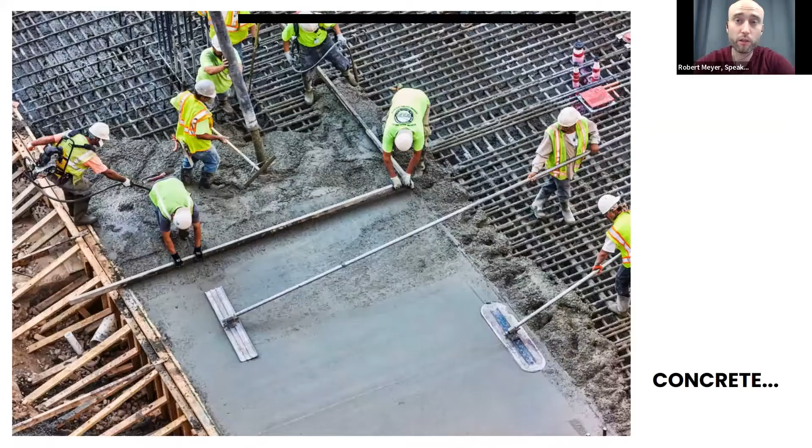So what is this big problem that cement and concrete has? Concrete is the most used building material on Earth. In fact, the only thing mankind consumes more of than concrete by volume is water. And it's just getting bigger, because it's expected that by 2060 the entire world's building stock will double.

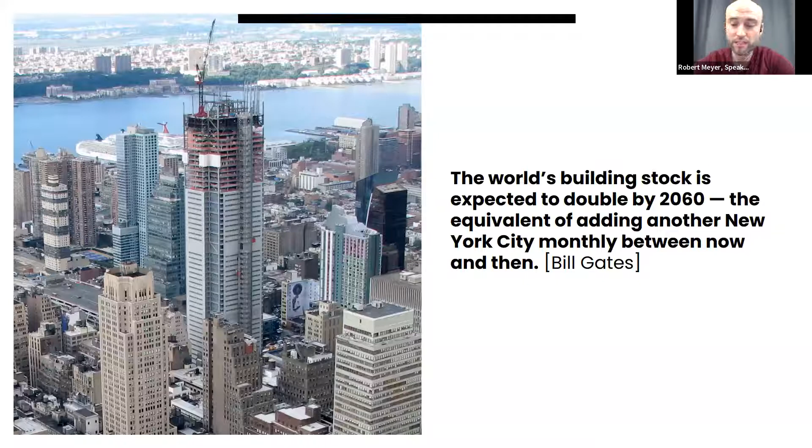That means from now until then, every month we will build the equivalent of New York City. And that's good news, because on one hand that means more housing for an ever-growing population, and on the other, more infrastructure for developing countries. But that comes with a heavy price tag: concrete has a massive carbon footprint. If concrete was a country, it would be the third largest emitter, right after China and the US, with about 8% of worldwide emissions.

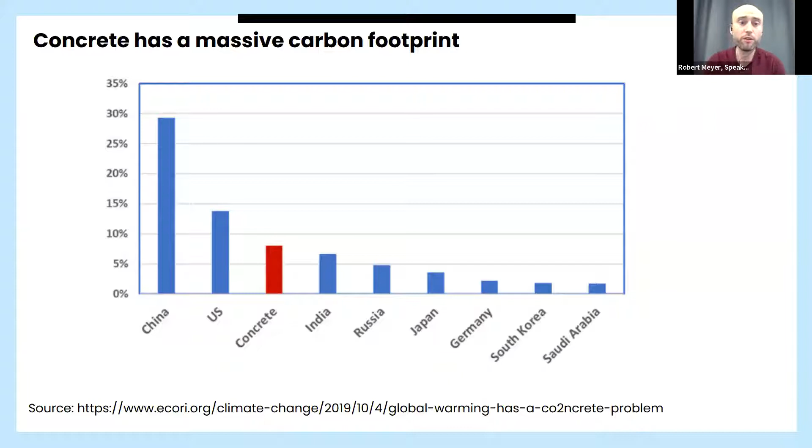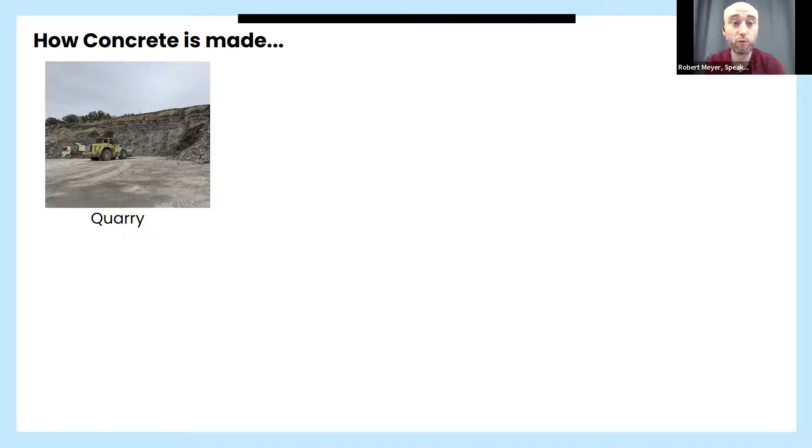So where do these emissions come from? To understand that, let's take a step back and figure out how concrete is made. It all starts in a quarry, a limestone quarry to be precise. That's great because limestone is available all around the earth, in the gigantic quantities needed to build our world. Then this limestone is taken out of the quarry into a cement plant, where it's refined into cement.

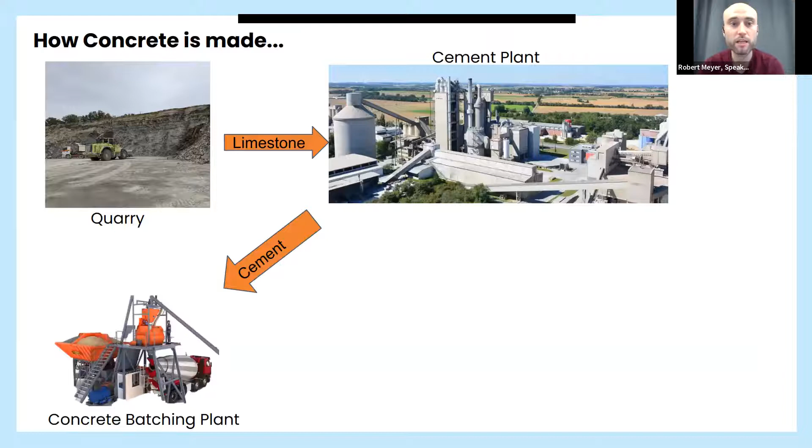This cement is the most important ingredient for concrete. It's taken to the concrete batching plant where you add sand, water, and gravel. Then you have concrete, which you can transport in mixing trucks directly to the construction site, where you pour it and build houses, bridges, you name it.

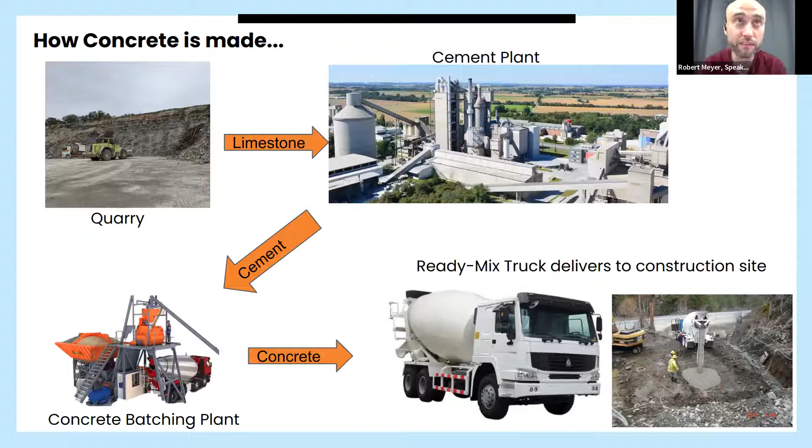Interestingly, if we look at this entire supply chain, basically the entire carbon footprint, about 90%, comes from a single step, a single step in the cement plant: the rotating kiln.

The rotating kiln is the step where you take the limestone from the quarry, which has been crushed beforehand, and heat it to 1,450 degrees. What you get out at the other end is something called clinker. Clinker is basically what gives cement and concrete their nice properties of getting hard and being able to build things with it.

The problem is, once you actually heat the limestone, the CO2 that was bound in the limestone gets released directly into the atmosphere. That's important—it means it's inherent to the production process. And that also means we cannot mitigate these CO2 emissions with renewable energies, for example.

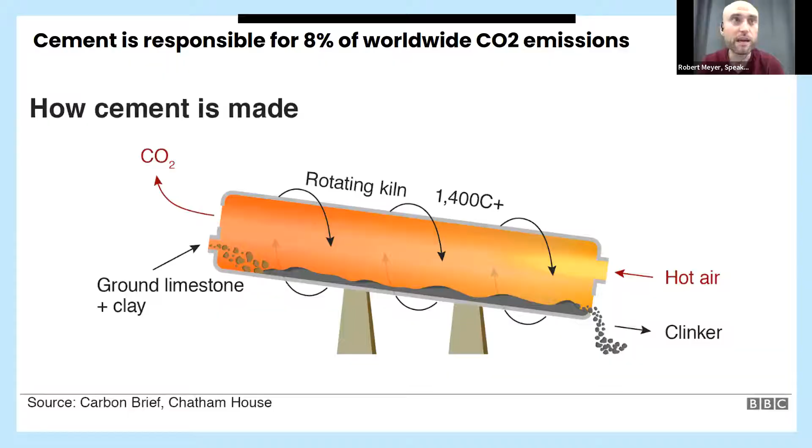So if renewable energy isn't an answer for cement, what is then? If there's this huge CO2 footprint, how can we not entirely get rid of this, but slash it by a huge amount? Here's the solution, or the one that we in our company like to propagate, because it's rather straightforward.

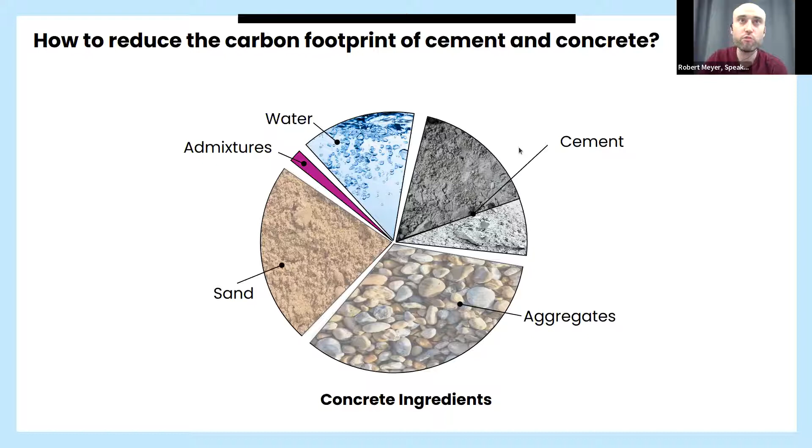If we take a closer look into what cement is made out of, basically speaking, cement is made out of just two things. One is the clinker, the stuff that's coming out of the kiln, which is responsible for the entire CO2 footprint. And then there are so-called supplementary cementitious materials, which are basically just filler materials.

Some of them have their own carbon footprint, like fly ash or slag, which are byproducts from coal power plants or steel manufacturing, but others are actually carbon-free. We are mostly interested in something called limestone flour, or fine limestone, which is limestone that has been ground very finely without burning it, meaning no CO2 was released, and therefore it doesn't have a CO2 footprint.

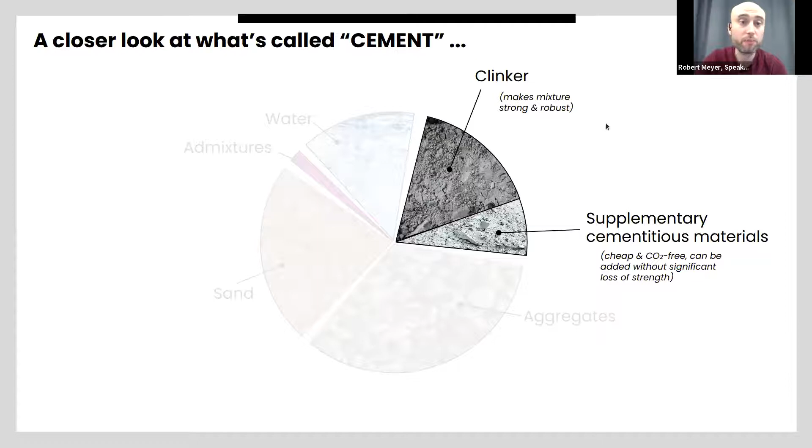So now the idea is actually very straightforward: just replace the clinker with CO2-free filler material. That's basically what we want to do - just reduce the clinker in this entire mixture.

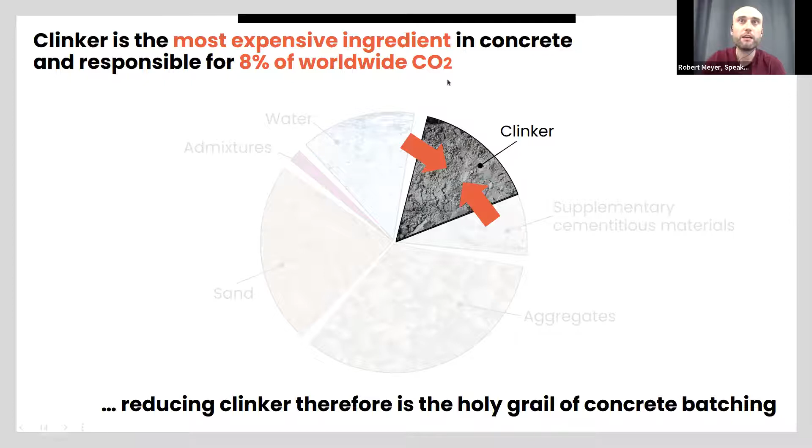So if this is regular concrete with regular cement, with lots of clinker and a high CO2 footprint, just by replacing the clinker with, for instance, limestone flour and a bit more admixtures and plasticizers, we can actually reduce the carbon footprint by 60%. So then we have low carbon concrete made out of low carbon cement, simply by replacing the clinker with CO2-free filler material. That's a very powerful lever to reduce the carbon footprint, because we can slash it by around 60%.

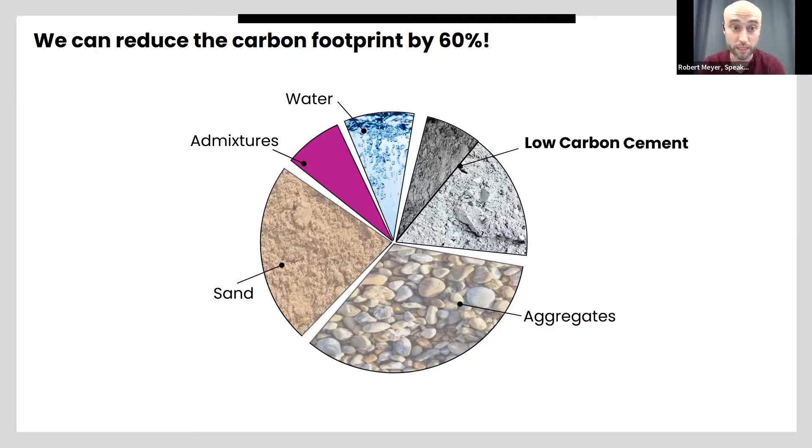And that is not a pipe dream, because we've actually done it. We created these new concrete recipes, tested them in laboratories to really make sure they're feasible building materials, and we even moved them onto real construction sites.

For instance, what you can see here is a construction site from last summer where we poured the foundation of a garage. And this summer, we moved a bit on, so there will be 3 stories of the next Berlin skyscraper also made out of this low carbon concrete. So this exists, this works, this is great.

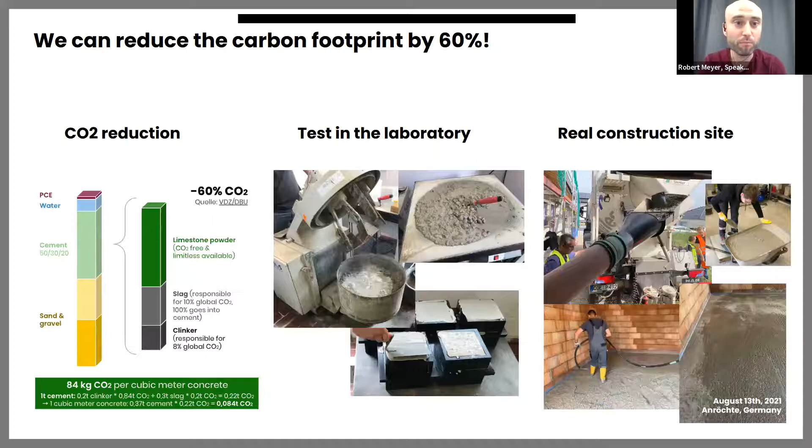So you might ask yourself, okay, low carbon concrete is there, hooray, but why on earth would you need a machine learning company or a data science company in order to produce that? There was nothing data science related yet. In order to understand this, you have to bear with me a little bit - it's going to be a bit of a lengthy explanation.

As I said, the most important property of concrete that makes it this super duper building material for the world is its compressive strength - its property to withstand huge amounts of pressure. We can measure this compressive strength of concrete in megapascal, as you can see here. And usually what you need for most building, like 80% of applications, is something around 25 or 30 to 50 megapascals right here. So this is the order of concrete we're usually looking at in mass applications.

So if concrete's most important property is strength, how can I actually modify the strength of concrete? There's basically 2 levers. One is the most straightforward one: using better cement. If I use stronger cement, I get stronger concrete, which is depicted here by these 3 different colored lines. The green line depicts weak cement, the blue one is medium strong cement, and the red one is strong cement. If I go into that direction, I can see if I take stronger cement, I get, as you can see on the y-axis here, stronger concrete - straightforward.

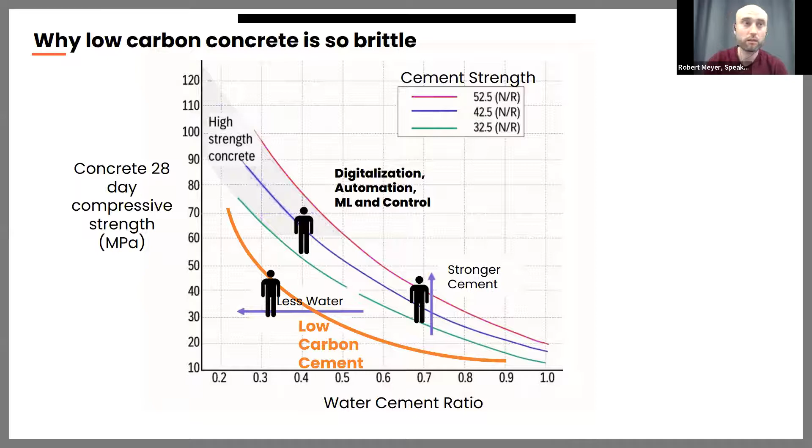Okay, so how do we do that? First of all, there's basically 2 things we need to get right. First is one in cement - we need to have a reliable compressive strength already in the cement. And the second thing we need to get right is on the concrete side of things, we need to have reliable and traceable water dosages.

Basically, this is referring to these 2 directions of errors that I can make in my concrete recipes with low water. So I need to make sure that the water is right, removing that kind of error, and I need to make sure that the cement is actually reliable. So if I order something that should have 50 megapascals, I can actually be confident that it will have 50 megapascals of compressive strength.

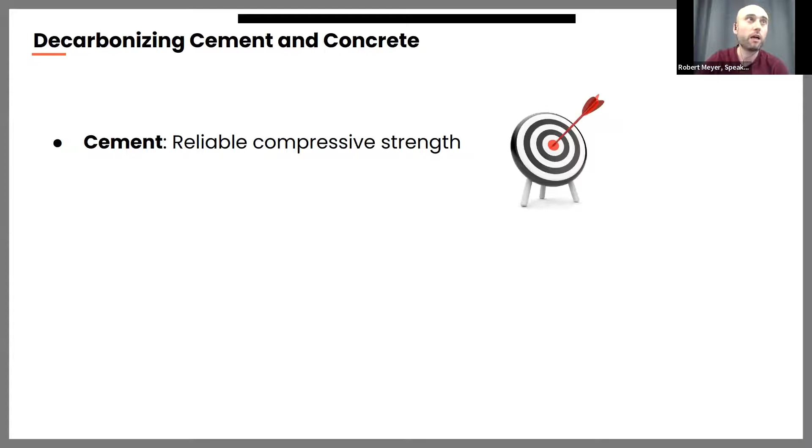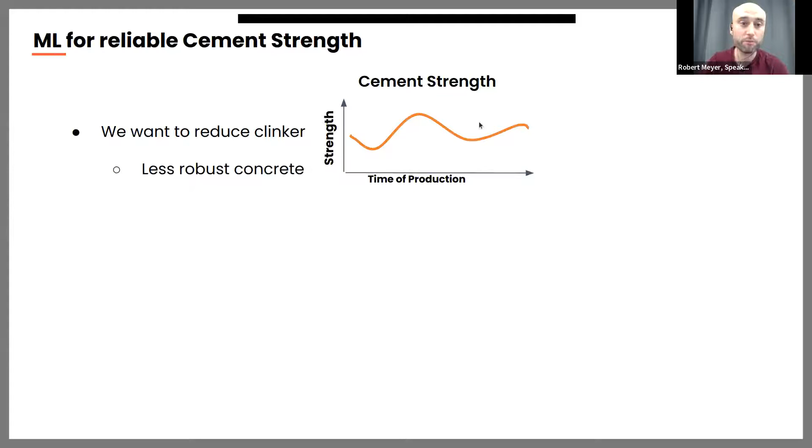Okay, let's first focus on how to do that in cement, how to get reliable compressive strength. This is important because we want to reduce clinker, which means we get a less robust concrete. So basically, if the strength of my cement already fluctuates, because we have to operate in this low water regime...

What will happen to my final concrete is it will fluctuate tremendously. So if this is the strength at the time of production, basically my low carbon concrete recipes with very few drops of water will actually amplify any problem that is already present in the cement strength. So what I want, instead of this fluctuating curve, is a very consistent homogeneous product - this should actually be a straight line.

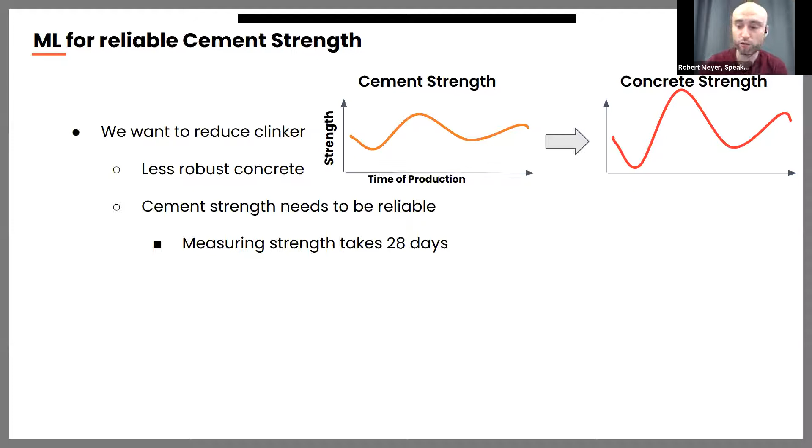The problem is actually getting cement strength right is a very difficult endeavor. And the reason is because measuring strength, be it cement or concrete, actually always requires you to make a concrete cube. So if I want to measure the cement strength, I take a standardized amount of sand and a standardized amount of water, form a little cube, let it sit and harden for 28 days, and then you have to crush it. So it kind of looks like this - you have this cube that was hardened for 28 days, and then you crush it, and basically then you can measure your strength.

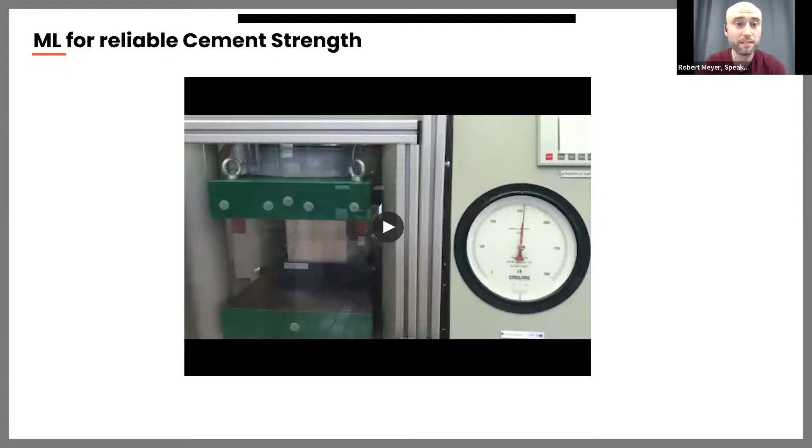But that's quite problematic, because that means for everything I produce, the core quality of my product is only known to me a month after I produced it. And then already all of the cement I produced and all of the concrete made out of it will already have been shipped and used at the construction site. So basically I can only correct my errors a month after I produce stuff. And this is, of course, very, very difficult to handle.

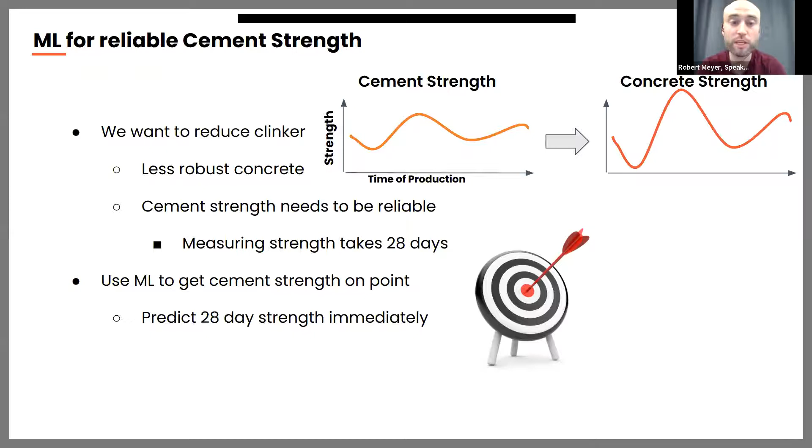And if I can only react with a 28-day delay, getting something like very homogeneous and reliable is really, really difficult. So what we now do is basically try to predict the 28-day strength at the time of production, so we get rid of this 28-day delay entirely.

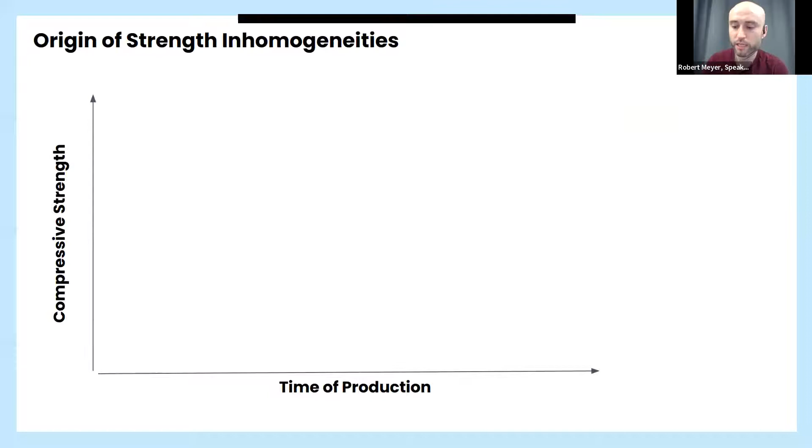A quick side note, you might be wondering why cement strength fluctuates. As I said, cement is made out of a natural ingredient. It's basically limestone that has been ground very finely, burned and ground. So the chemical and mineralogical properties of the limestone propagate into the cement and have strong influences on the compressive strength.

Because if you look into a limestone quarry, every cubic meter looks very different. You can see it by the colorful stones in a limestone quarry, there's lots of variation in nature. So this is what you can see here.

So maybe last Tuesday, I got very fine limestone, which produced cement that got very strong. But a week later, I'm unlucky and my limestone isn't as good in its chemical and mineralogical composition, and I get cement that doesn't get as strong. This is how these fluctuations in cement strength actually happen over time of production.

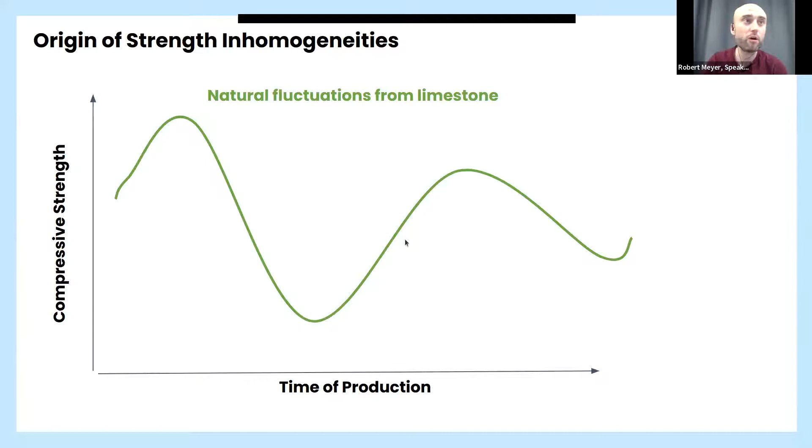So the idea is that we counterbalance these fluctuations with another property that has a strong influence on the strength of the material, and that is the fineness. Because the more finely I grind my cement, the more surface area it has to interact with the water and get stronger.

So if I have limestone that yields very high strength cement, I can counterbalance this by grinding much more coarsely, and vice versa. If I have something that doesn't get very strong, I grind more finely. The resulting material, due to this counterbalancing, will be very reliable and have a homogeneous strength over weeks or a month of production.

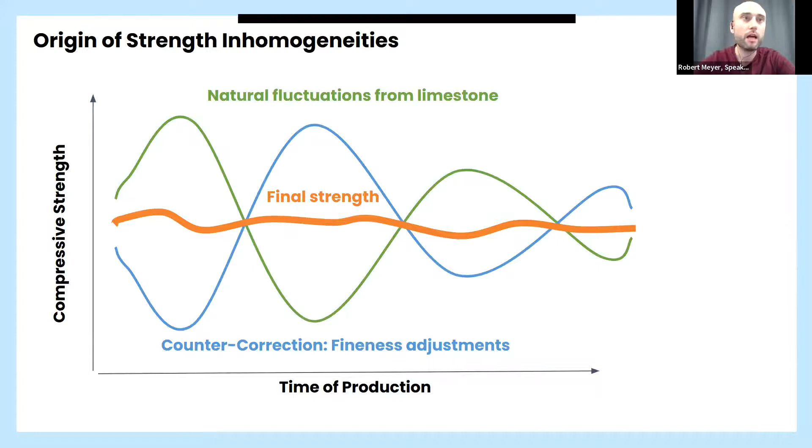So if I want to produce a cement with 50 megapascals, I can make sure that year round I will produce a cement that has 50 megapascals of compressive strength. Here's how that works in the final step of the cement plant.

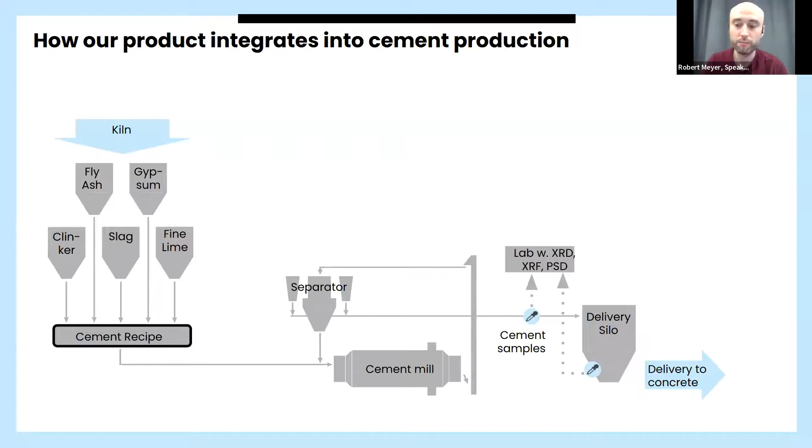And this full picture of the material is then exported into our cloud system, where we run a machine learning algorithm on this full picture of the material in order to predict the strength it would develop if I formed a cube out of it, let it sit for 28 days, and crushed it. So we really predict the 28-day strength of the material.

And now we can immediately react and don't have to wait a month until the actual strength result is realized. So if the prediction says you're producing something that's getting too strong, we can counteract and say grind more coarsely. We can calculate optimal fineness set points for the cement mill, feed that back into the plant, and the cement mill will be changed to grind a bit more coarsely.

Then a few hours later, like 1, 2, or 3 hours, the next sample is taken, and everything will be on target. This loop runs 24/7 year round in a cement plant in order to keep cement strength really on target.

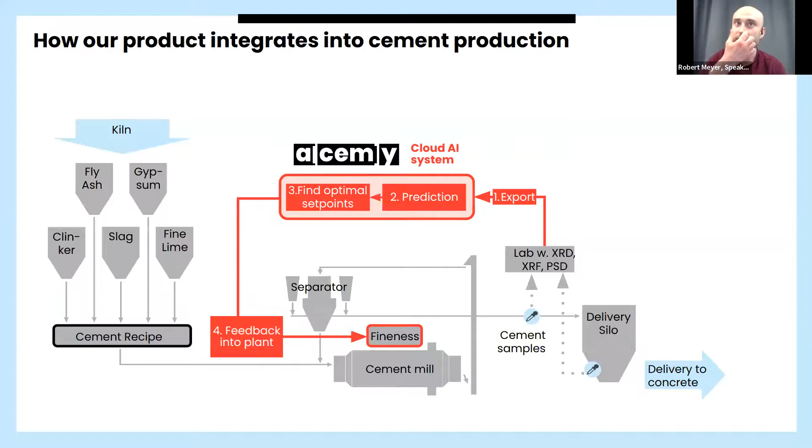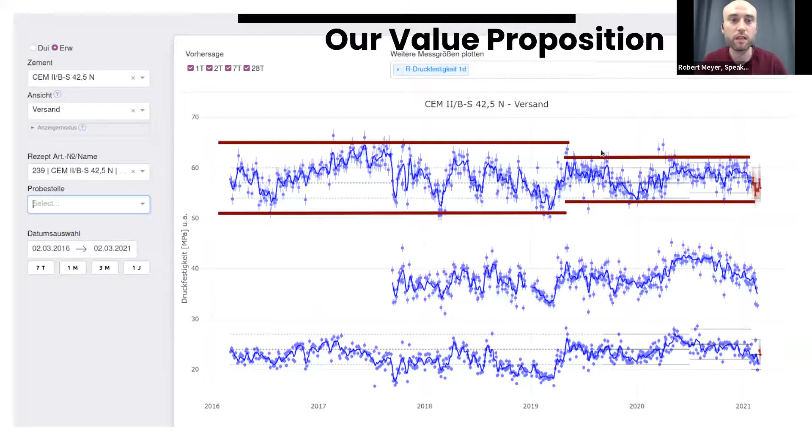It goes from 50 to 65, 66 megapascals over time. Then basically from then on, in 2019, we started with our control loop live in this particular cement plant, and we were able to reduce these fluctuations by around 25 to 30%. And this is actually quite a lot for an average cement plant.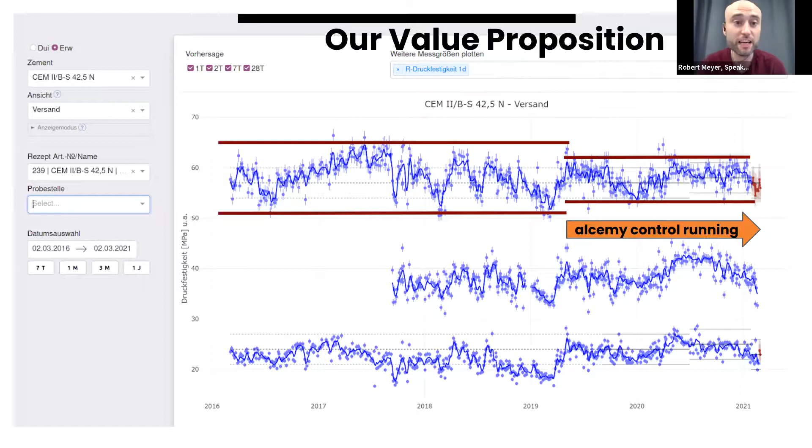Usually that amounts to savings on the order of 300,000 to 500,000 euros, a mixture of different things. It could be savings on grinding energy. It could be savings on actual CO2 certificates, because now I can really reduce the clinker even within the cement standard that I currently have, and just counteract with more fine grinding. Or because I have a better quality cement, I usually can also charge a bit more with my customers.

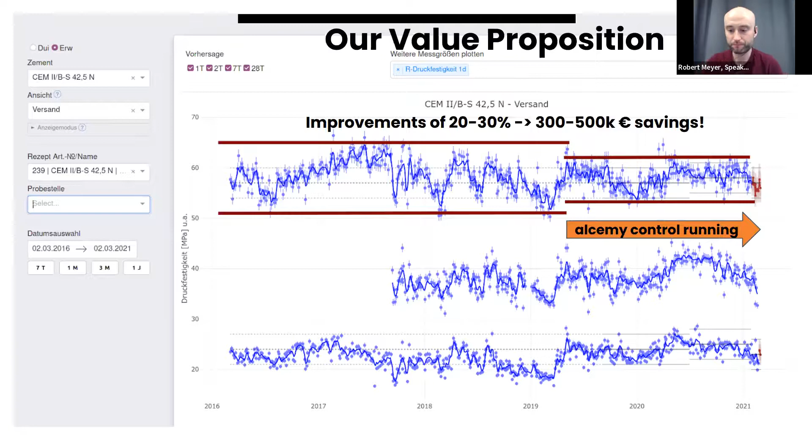So basically this is the first application of machine learning in order to get the cement strength right. I was also asked to be a bit more technical, so maybe here are some learnings that we drew on the way.

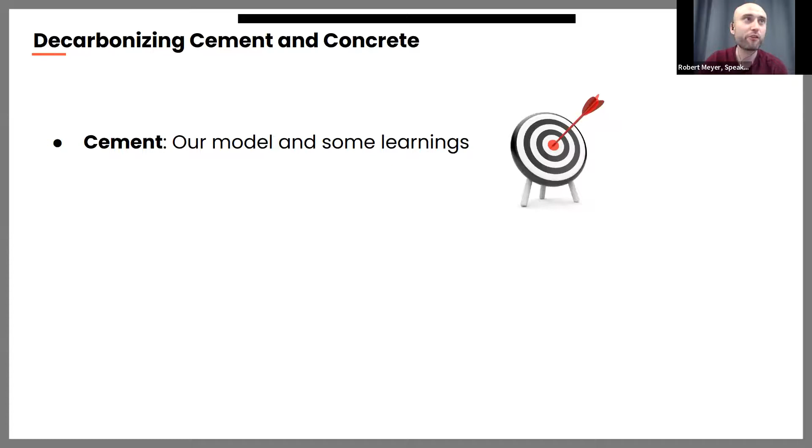Maybe for the ones that are interested, this is how the data actually looks like. It's basically for every plant that we have a giant spreadsheet. So here is the feature vector - some numbers related to the actual fineness and the particle size distribution, some numbers related to chemical compositions, and on the right you can see numbers related to the mineralogical composition of the actual material. So one of these rows makes up a feature vector, and on the left you can see the actual results of the 28-day strength experiment where they crushed a cube - this is then our target variable, and with this giant spreadsheet we can train our machine learning models.

In fact, the actual feature vector is a bit longer. This is like a subset of all the measurements that are taken from the XRF and XRD and the PSD, but basically this is how it looks like.

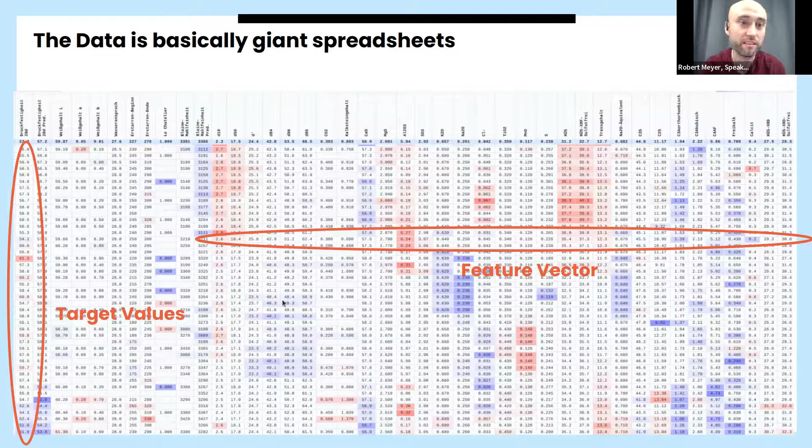We are a machine learning company, so we like to play around with machine learning algorithms, and we tried a lot of them. Of course, we tried PyTorch neural networks because who doesn't want to call themselves a deep learning company? PyTorch is really great to play and tinker with. So of course we tried this, but we also tried support vector machines, Gaussian processes, XGBoost, you name it - loads of different stuff we tried.

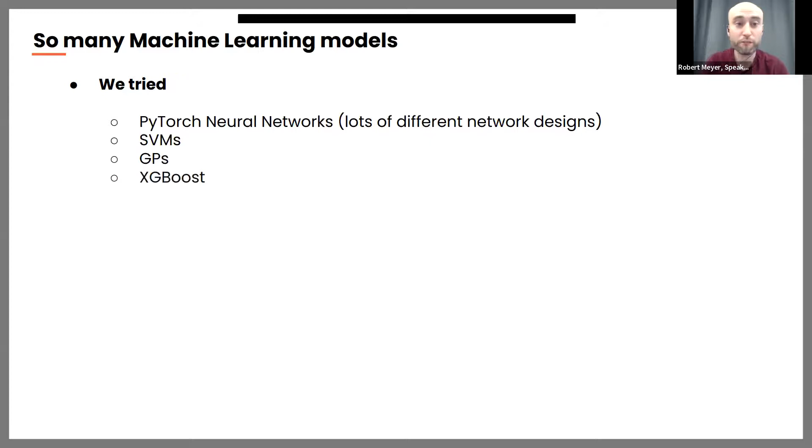But unfortunately, and this can be a reality for you as a machine learning company, actually the model that you're using doesn't make a huge difference. Because all of these basically show none to marginal improvements, but even worse, all of them are very, very black boxy. What we actually ended up with, which is deployed in production, is a combination of just regularized linear regression, and on top of that, a random forest that corrects the error of the linear regression.

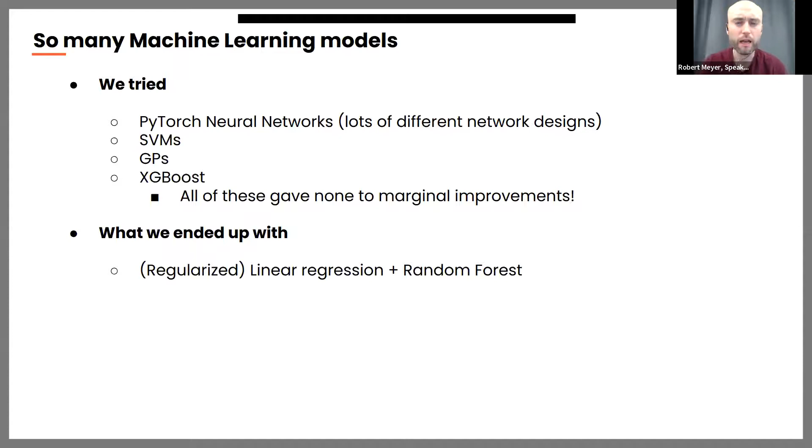And this is great because if you have machine learning in production, simple models are your friend. Because we are using our machine learning in a control loop, meaning we really need to be confident that the machine learning learns some causal relations and not just some spurious correlations in the data. So just by looking at the coefficients of the linear model, we can already identify if the model picked up some meaningful relations in the data.

Because if the coefficients show stuff that is known to cement process engineers, then it's great because then we can use that in steering - for example, we regulate or steer the cement by modifying the fineness. So the coefficients should pop that out, right? There should be a strong relationship between the fineness of the material and the final resulting strength, and how the model makes the prediction. Or stuff like titanium dioxide reduces strength, or C3S fosters strength. So if that pops out in the linear coefficients, we're happy, because that tells us the model picked up something meaningful. So for real machine learning in production, simple models are your friend.

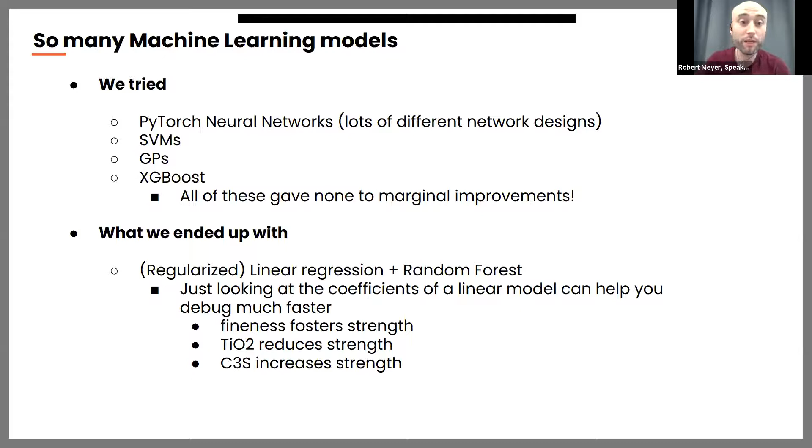What we learned, which is actually way more important than the models themselves, is the pre-processing of the data. For example, with any physical data, like from physical processes, like XRD and XRF values, you need to do outlier filtering, because these experiments tend to yield sometimes spurious or erroneous measurements, and they need to be discarded.

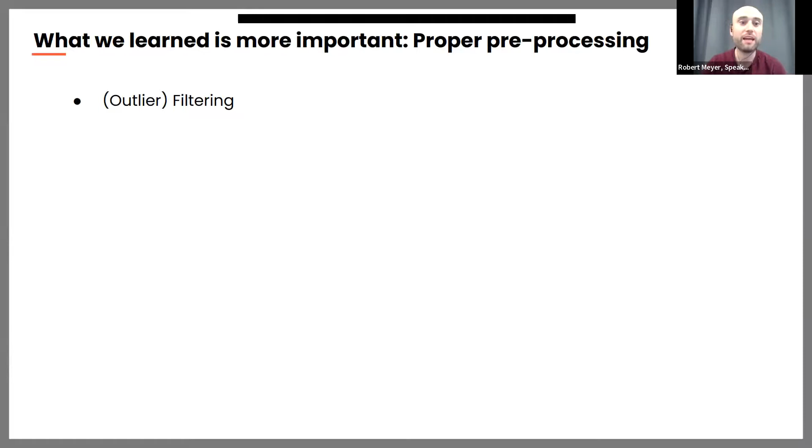But the problem is sometimes outliers actually tell you something, because something happened in the actual cement plant which was bad. So our model could actually learn from this. Really figuring out when something tells you something, and when something is so weird that it's supposed to be an outlier, finding this threshold of when to discard stuff and when it's still feasible for learning, that's usually a good place for hyperparameter optimization.

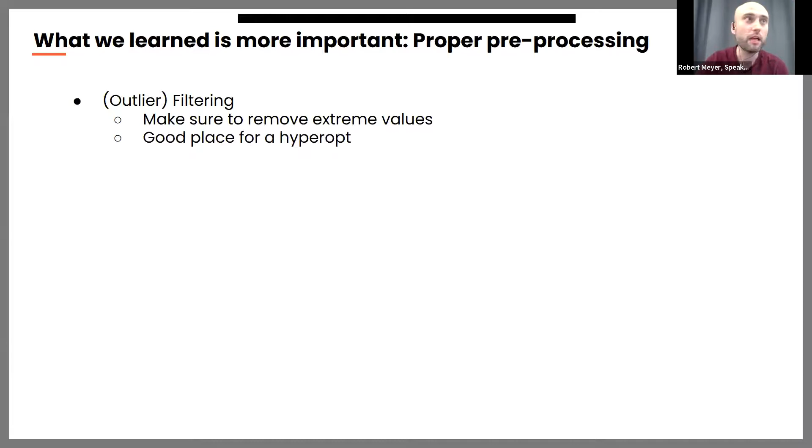Also, what we learned, which is very important in our setting, is proper imputation, because oftentimes the measurements of these experiments or devices tend to fail and miss. So we do need to do proper imputation, and proper imputation also encompasses this meaning: if you have samples that have no features, because all or the majority of them are missing, discard them. There's no need to learn from this kind of data, because that will introduce strong biases in your model.

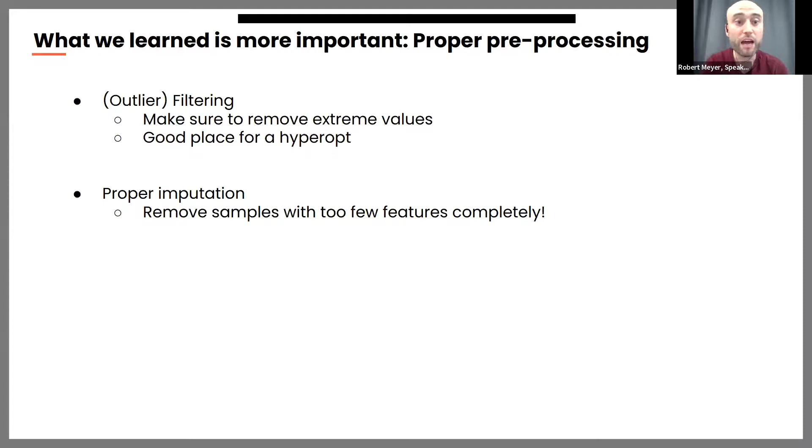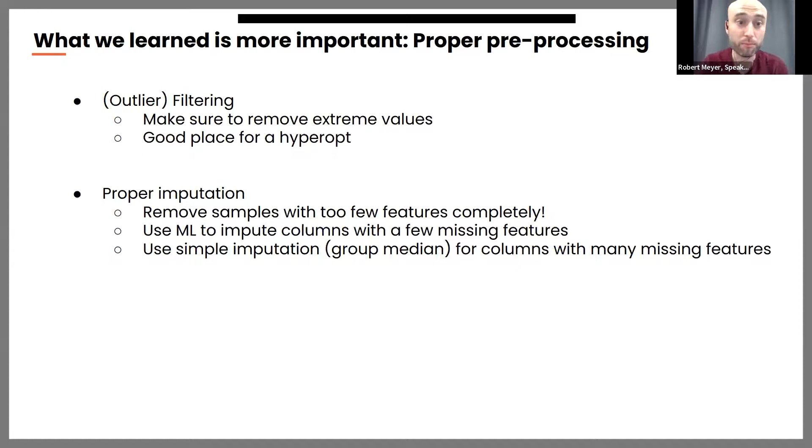But if you have just a few missing values, it might actually be worthwhile to apply machine learning already in your pre-processing step, trying to predict the missing feature from all of the other features that are there. But if you have columns with many missing features, using machine learning to impute this will again introduce heavy biases into your model. So deciding which of the three to do, and when, that's also a good place for hyperparameter optimization. Okay, so that was a quick detour over the learnings that we had.

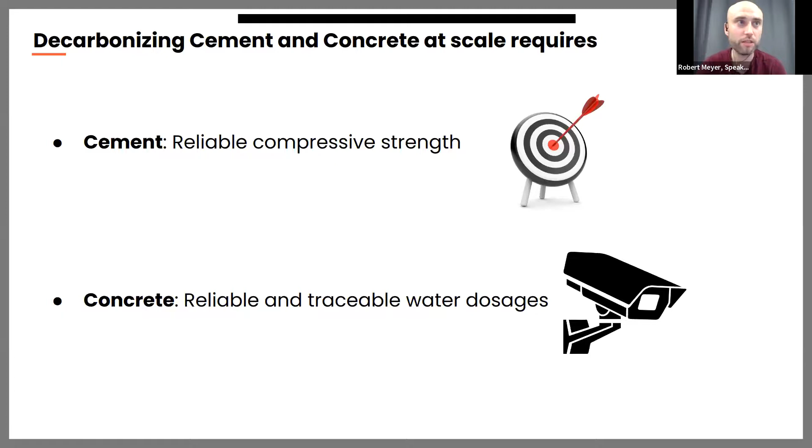So coming back to the overall topic: in order to make low carbon concrete scale and work, what we need to solve is basically two problems. The first is in cement, getting reliable compressive strength, and I just showed you how we do this with machine learning. The next one is actually in concrete, because both need to be in place to make low carbon cement and concrete scale at the mass level for mass application. We need to have reliable and traceable water dosages.

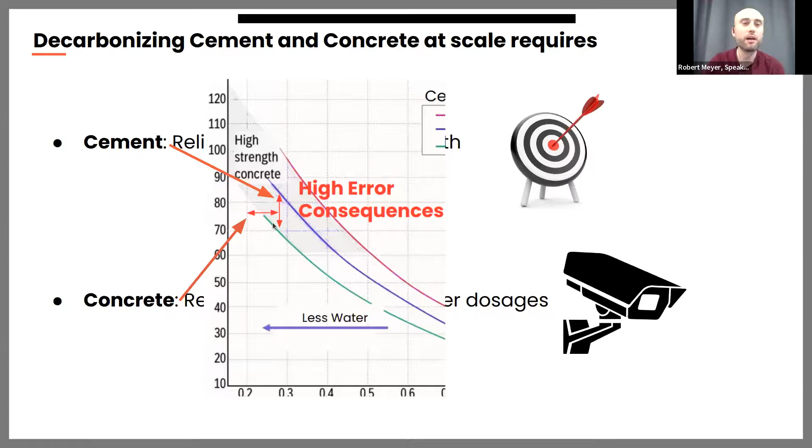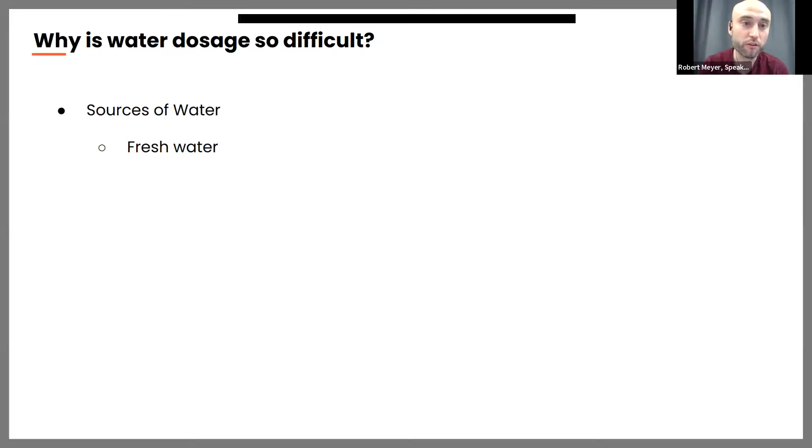So for now in cement, we talked about this error in the y direction, and now we're looking into the error of actually making wrong water dosages. You might ask yourself, why is it so difficult to actually get proper amounts of water into my concrete? Well, because there are different sources of water, how water can actually enter the concrete. One is fresh water. That's fine, because that's the actual water that you can dose, that you can weigh on a scale. So if you want to dose 100 kilograms or 100 liters of fresh water, just measure it and dose it. That's fine.

But there's also something called recycling water. Whenever a concrete truck returns to the plant, they have to clean the drum for the next batch of concrete. This water that was used for cleaning the drum cannot just be put into the sewer, but has to be recycled. So it goes into a recycling tank and has to be, over the course of the next batches and concrete deliveries, used or dispensed into the coming concrete and future orders.

So if I have to mix my concrete with fresh water and recycling water, because there are already concrete particles in there, it has a different density and can already have solid mass in it. So if I dose 100 kilograms of recycling water, I might end up with just 90 kilograms of water and 10 kilograms of solid mass. Actually figuring out how much is much is really, really difficult. Recycling water can have severe consequences on the actual amount of water available to the concrete in order to form a reaction and get hard.

Another source of water is the moisture in my sand and gravel. Cement itself is stored in a silo, and that doesn't get wet, and it shouldn't, because then it would get hard.

The sand and gravel are usually stored in plain sight, so when it rains, they get wet. When I then dose that into my concrete, if I dose 100 kilograms of sand, there might be 5, 6, 7 kilograms of it that's already water. This is another source of water in my concrete.

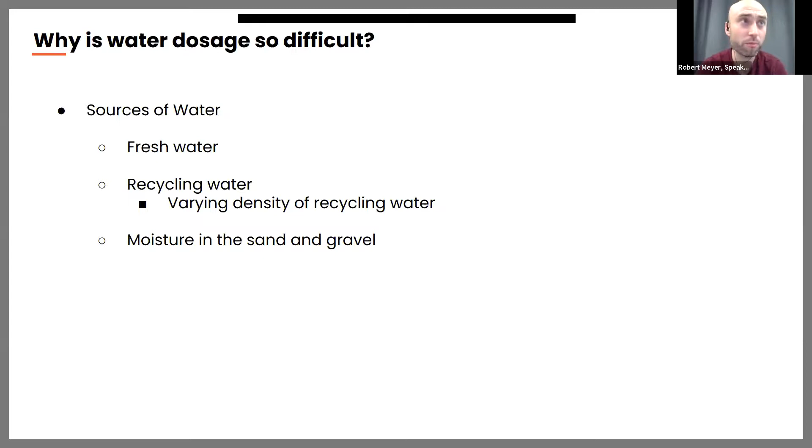For measuring actual moisture of sand and gravel, there are moisture sensors, but they are quite unreliable, and you have to calibrate them well. In the everyday life of a concrete plant, where stuff has to move super fast, usually nobody has time to really take care that the sensors are properly calibrated or cares about the sensors at all. Unfortunately, sand moisture is really hard to measure, especially for coarser aggregates like gravel.

Then there's another source of water which shouldn't happen: water that is added at the construction site. Usually that's frowned upon, you shouldn't add water at the construction site, only plasticizers, but people keep doing that. If you had a batch of low carbon concrete in your drum and you added water at the construction site without properly tracking how much, the concrete is going to get flawed. That's kind of bad, but it happens, unfortunately.

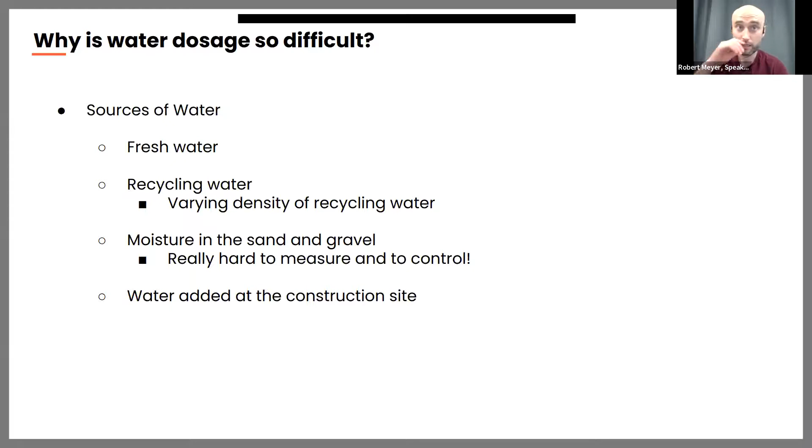So what we're building, which will be released in about 2 to 3 weeks, is an application to make this water, make every drop of water, traceable.

What we're currently building is a cloud application that takes data from the plant, especially the power consumption of the mixing drum, because that's a very good correlate of the actual water content and consistency of the concrete. More importantly, we also equip concrete trucks with sensors to really monitor the concrete as it's driven from the concrete plant to the construction site.

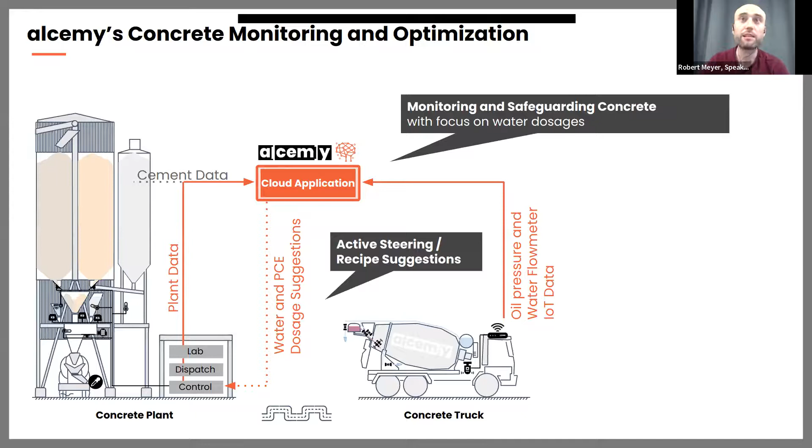In a concrete truck we have 3 different sensors. One is an oil pressure sensor, which measures the oil pressure needed to rotate the drum, and that's another great correlate of the consistency and water content of the concrete. If it's very stiff, it's very hard to turn the drum; if it's very fluid, it's easier to turn the drum, and we can see this in the oil pressure sensor.

Then we have a drum speed and direction sensor, because drum rotation in one direction means it's mixing, and in the other direction means discharge, so the concrete is actually poured at the construction site. This makes it easier to identify where we are in the process, whether we're still transporting, etc.

This is a bit unfortunate, but by far the most powerful sensor we equip, and the easiest and most straightforward one, is just a flow meter. Here's the water tank where you can add water directly into the drum, or water you can use for cleaning your truck. We just add a flow meter here to track every liter of water that is taken out of the tank.

In combination with, for instance, the drum speed and direction sensor, we can reconstruct whether the water was dosed for cleaning, or whether water was really dosed into the truck drum.

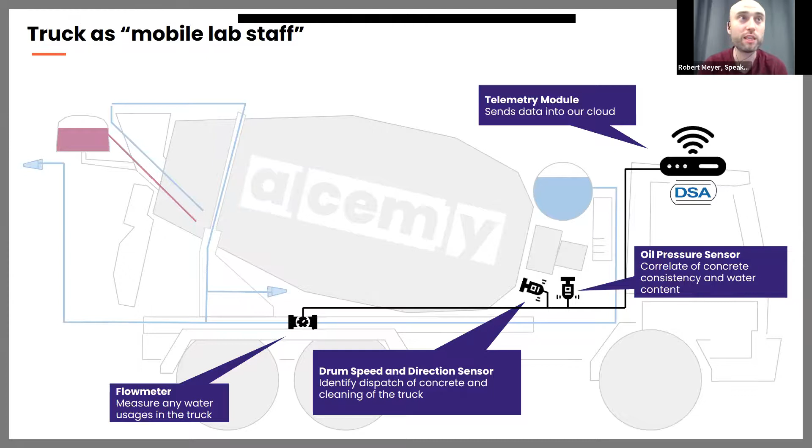All this data is fed into our application, and what we're building is an app that can be used by lab staff to multiply themselves. Now every drop of water is accounted for, and we make this visible to the lab staff.

So they can now see every panel here. What you see corresponds to one particular construction site, and they can supervise and monitor each construction site from the laboratory, without having to ride along with the concrete to the site. They really see how their concrete behaves right from when it's dosed and mixed at the plant up until it's discharged at the construction site. It makes it super powerful.

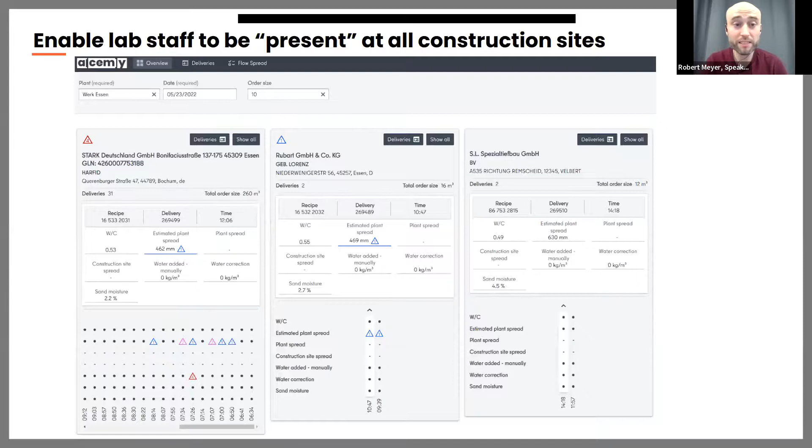So basically with these two applications, the machine learning control loop in cement and this application that makes every drop of water traceable, we're going to unlock or reduce this massive green premium on low carbon cement and concrete, so that low carbon concrete can actually now compete with regular concrete and will in the medium or even short term already overtake it in 80% of the applications.

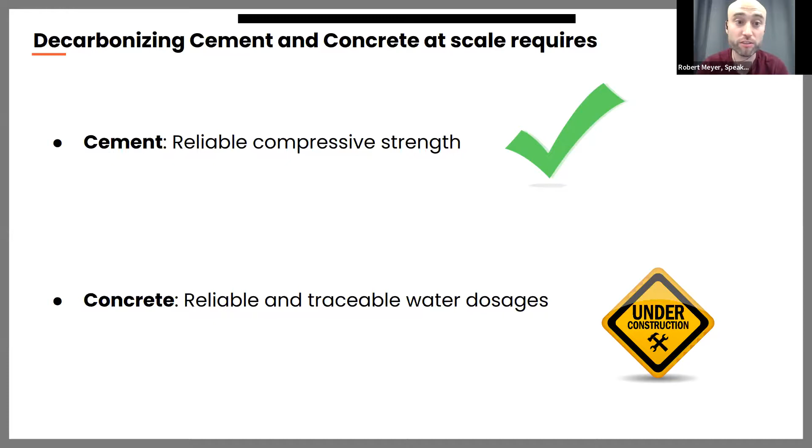So basically this is a product that has been live now for a bit more than one and a half years, and now 5 or 6 plants already. The concrete application is still under construction, but we're going to release it in 2 to 3 weeks. And in this combination, we will actually showcase that both work together by supplying low carbon concrete to the Edge East Side Tower in Berlin, building an actual skyscraper with that. So yeah, thank you very much.

Here's a quick recap. Basically, concrete is responsible for 8% of worldwide emissions. That's kind of bad. But low carbon concrete exists - that's a good thing. The only problem is it has a very high green premium because there's so much manual oversight and labor involved. And the reason is because you need reliable cement strength and precise water dosages. But we can use machine learning to get cement strength on point, and we can use a data application harnessing all the data and new sensors on trucks in order to make water dosages traceable.

Thank you very much. Are there any questions?

Why not grind really fine all the time? What are the cost energy consequences? Well, the problem is, you could - this is a valid strategy - grind pretty fine and then try to reduce the amount of clinker that you already have given in a particular cement standard. The problem is that the energy consumption and the energy amount you need to grind more fine grows roundabout exponentially with the fineness you want to achieve.

Yep. Are there any more questions?